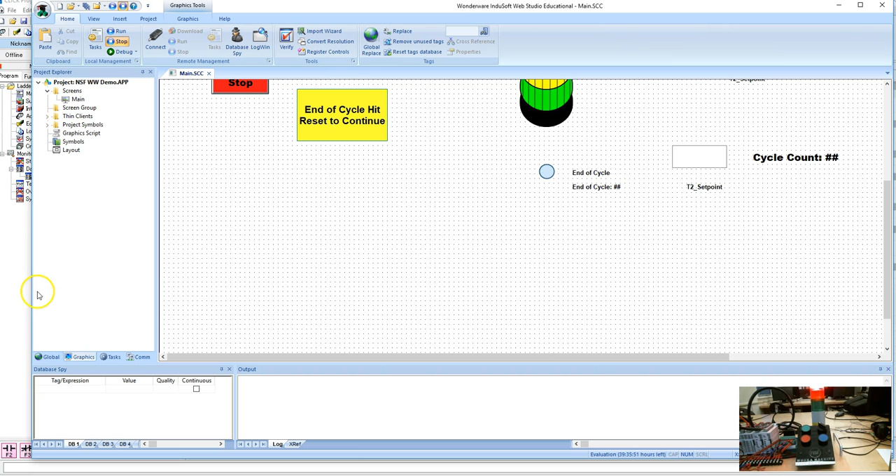What we have, and one of the things that we have to do, is import pictures of what some of the trainer parts look like.

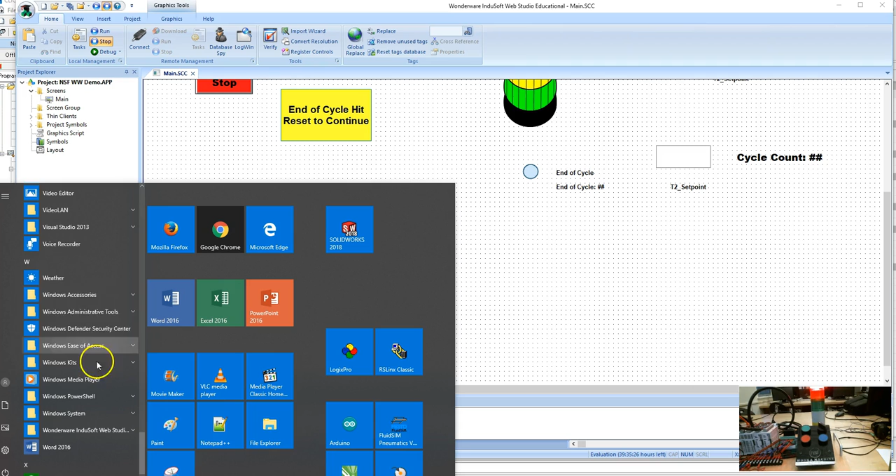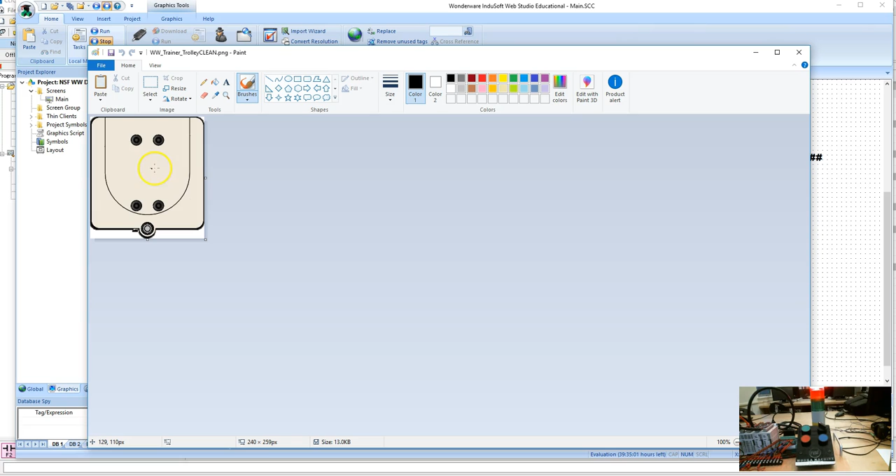And to do that, the best way I know how is to get Windows Paint opened up, and we can select what we want. I have some files on my computer with a whole bunch of pictures, some bitmaps and some PNGs. This is our trolley car, and this is the cup carriage. This thing moves back and forth from position to position.

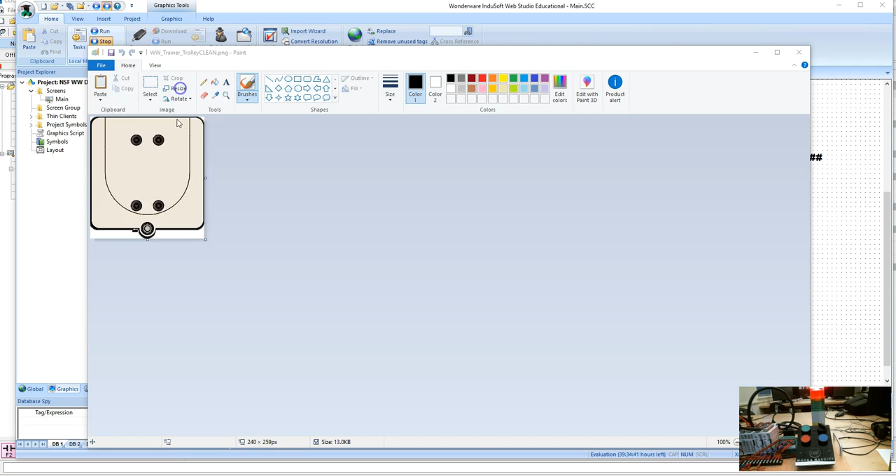Now this is a picture of what it looks like on SolidWorks. What we do is crop out around the part. This one looks a little too big, so I'm going to resize it, maybe make it half as big. Okay, so now that'll work better on my screen.

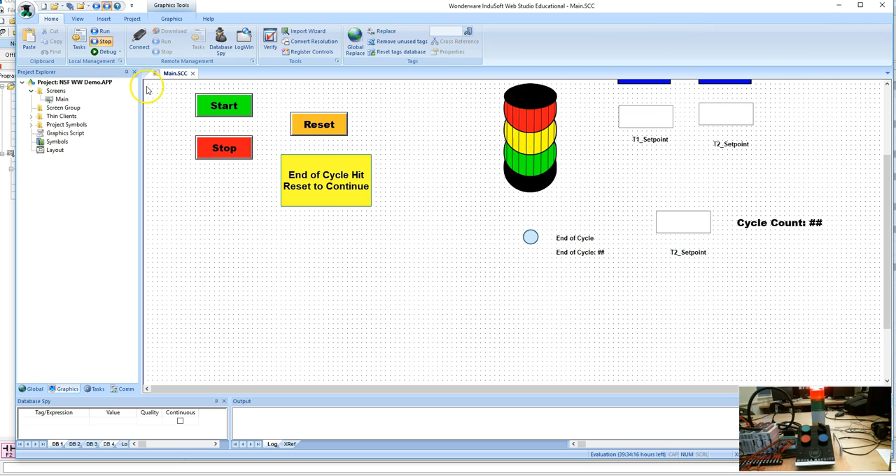So I just do Control A, Control C, and when I go in here I want to put it down here, so I'll do Control V. Now one of the things WonderWare does, it doesn't matter what the screen looks like, it always puts it right in the corner here. So if I do Control V, it's going to put it right here, and then I can move it. There it is, I don't know why it does that, but there's no way around it. So anyway, I'm going to move him right down here, and we're going to have him move across.

So just pretend here's where the cup dispenser is, and it's going to move down towards the sorter. Now what I'm going to do is also add a graphic for our sorter. Our sorter arm is a push bar that pushes the cup onto the sorter space. So I'll make a rectangle, try to line it up, and make him like that. I'll fill him in black.

Okay, so remember we have our counter, and we have it count a certain number of cycles. Now what I'm going to do is go in here, and we had the set point as DS1. Well actually, we have the set point on the screen. So before, this was count to 6, this was count to 4, and this was 6 cycles. But we have it on the screen, we can change it on the screen. So we'll go back into WonderWare.

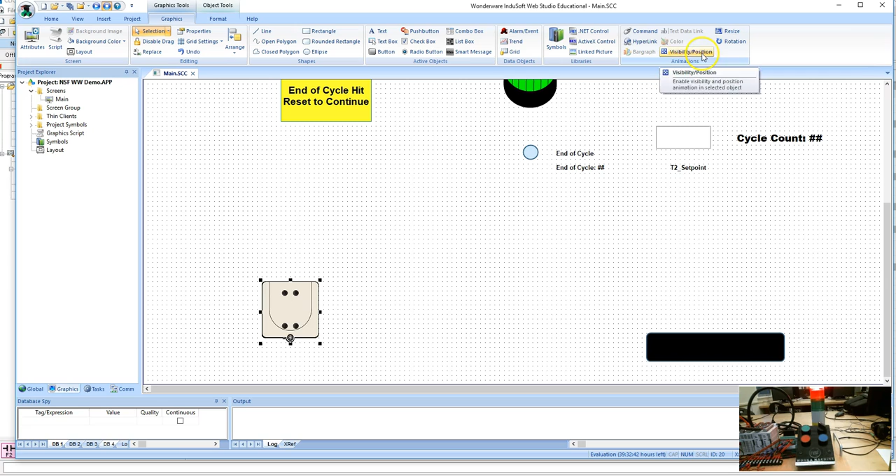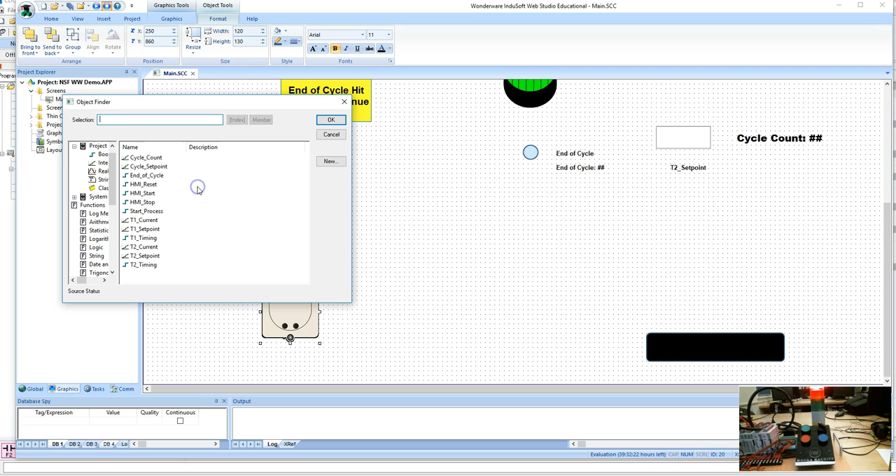Now what we have to do is add the animation. So we go into graphics, and in the animation, we put in color before, we did some visibility. Now it's visibility/position. So I'm going to highlight that, and I'm going to click on this guy, and now when I go into visibility, so this is visibility, I don't want that, but this is the position. So my horizontal tag, I'm going to use that cycle count.

My cycle count, okay, right now our cycle count is 6, but I'm going to up that to 10, and I'm going to make the position, not knowing where I'm going to be, just 0 to 100, and we'll leave it at that. And again, your 0,0 is here, so when it moves from 0 to 100, it's going to go this direction.

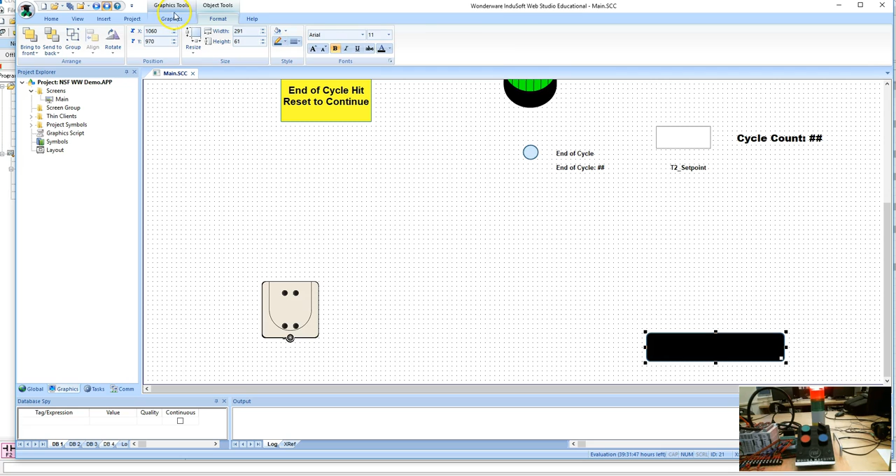Now for this, I want the push bar to push up, and I want that to happen at end of cycle. So I'm going to give him the position visibility, and when I go in here, it's the vertical position I want. So I'll have that with the end of cycle. And here, I'm going towards 0, so I want him to go negative. So this reference position is where he's at right now, and the value for this is going to be 0 to 1 because it's Boolean. And I'll say I want him to move minus, well, we'll make him minus 100.

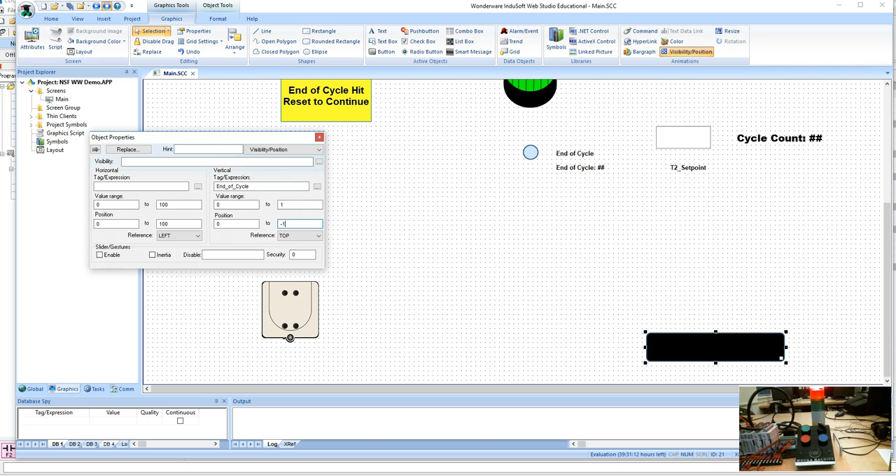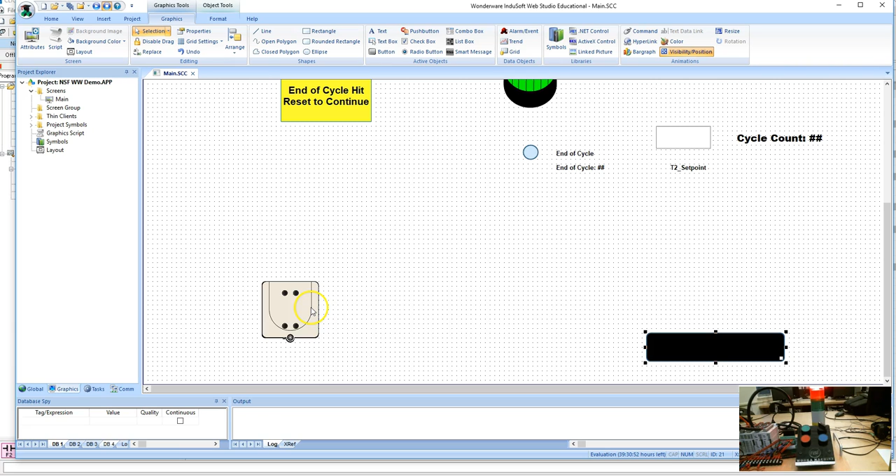Okay, so when this is set up and this is counting, as this cycle count is counting, it's going to start moving in increments. It'll be moving in increments of 10 since we're going to set this to 10, but it's counting to 100, so each move will be like a small little jump of 10.

So I go into, and we haven't changed this program at all, but I still need to connect up here. And this is the program that we've been running for the last couple of these guys. So let's see, right project.

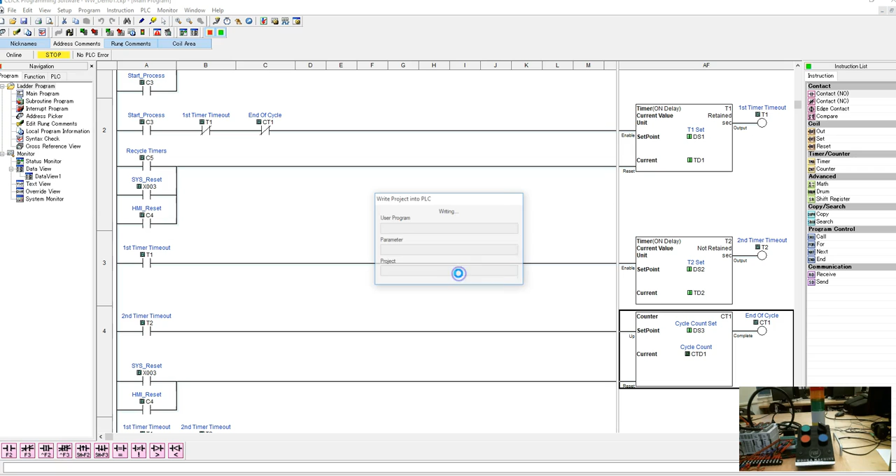Okay, stop it and start it again, and this should be ready to go. Now hopefully when we do the WonderWare, and we're going to go into run mode, the only thing we change is put visibility in here. And actually this bar is, well, our cup needs to be actually a little bit higher, I think.

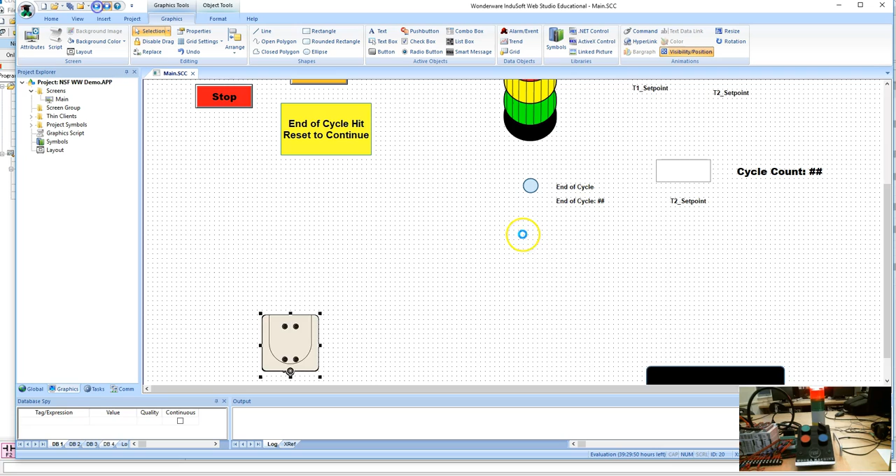Or no, okay, so I was practicing, so this is already in the up position. So let's go back into run mode, and if we reset it should move back down. At least that's what I'm sticking with right now. Okay, so it did, and we have the cycle count at 10.

So if we reset and we start, every time this counts, he's going to creep over a little bit. So let's see, and we are going to have to, so that moved a little bit there, and you can watch it incrementing just a little bit when it counts.

Now we're going to have to speed up this counting, since this is going pretty slow, and he's not going to make it all the way over here. I can pretty much tell that. Probably only make it about halfway.

So we'll kind of gauge where he's at, but if we're counting from 0 to 100, the two things we can do, well, if we cut this down, then the jumps will be bigger, but we can speed it up, and we can make that from, instead of 0 to 100, like 0 to, I don't know, 250 or something, or 300 maybe. See what it looks like.

But when we do get up to 10, this push bar is going to push. So if this cup carriage was in the right place, and if we had a visualization of a cup on there, when this moves forward, we could also have the cup move forward and fall into the sorter slot. We're still kind of finalizing the HMI for the actual system. We're still not even halfway through the semester, so we've got a little time to go. We have a pretty good baseline, but this is some of the stuff that we're trying to do with it.

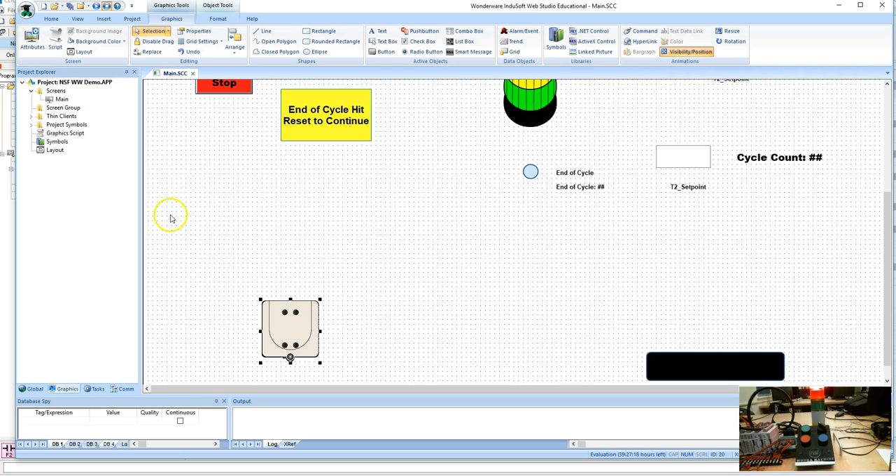And we'll go into run. And the first thing I want to do is I'm going to make this count fast. So I'm going to be 2 and 2 again. And when we reset it, this will move back down, and this will move back to its original location. So that's where our starting point is.

And now he'll be counting, and let's see if we get a lot closer to where we need to be when he pushes. And if it does, well, he'll be a lot closer, so we'll just let it go at that. But you get the idea of what we're trying to do. We can put in the position, we can also do visibility, so we can get whatever movement we require. Now, you know, it's trial and error at this point.

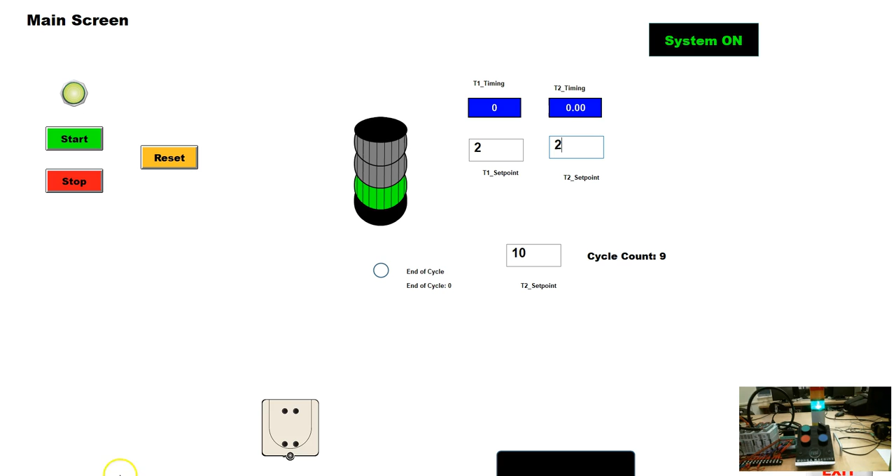So I think what we'll do right now is we'll put in another timer that'll kind of, well, that didn't get us much closer either. So, okay, let's exit.

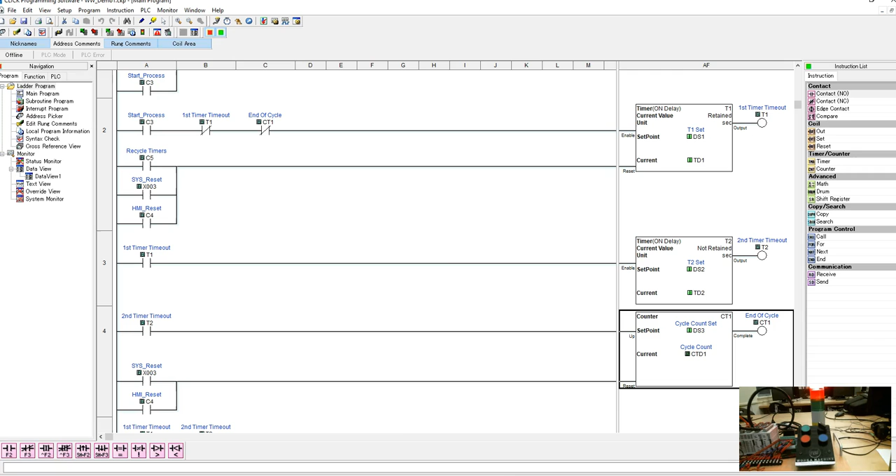Okay, so what we're going to do is I'm going to copy all these guys again. Well, let me, I was going to put in another counter set in here. So what I want to do is I'll go down to the end here and insert a rung, insert another rung, and insert another rung. And I'm just going to put in one quick counter.

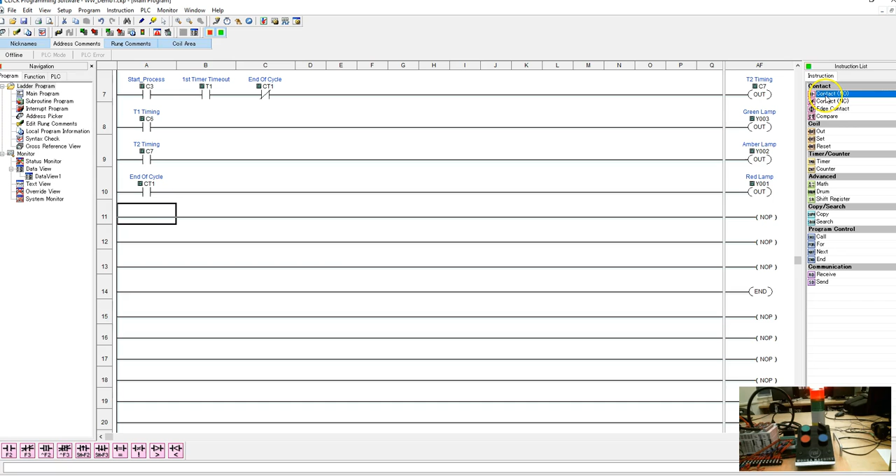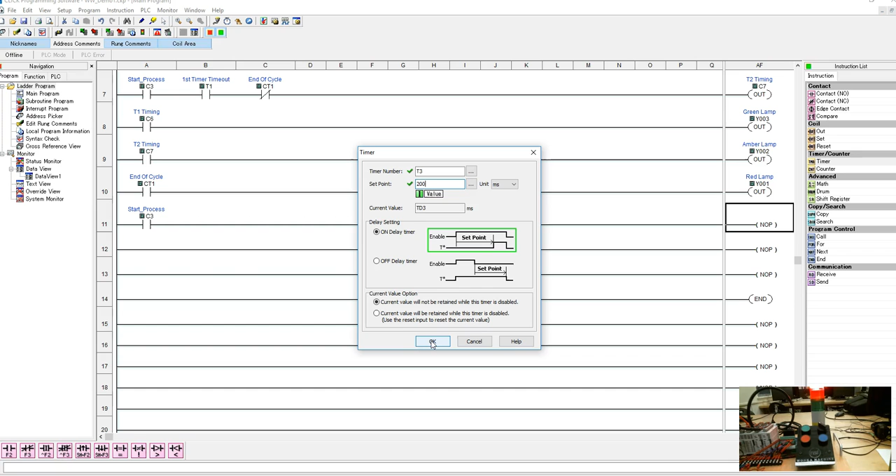So let's say when we are in start process, so that'll be C3, and I'm just going to put a timer out here, and I think we have T3 available, and my set point, I'm just going to make that, I'm going to make it count fast, so 200 milliseconds, so count 5 times a second.

And what I'll do here is I've got to recycle the counter. I am going to put a normally closed contact in. It'll be T3 that'll just recycle itself. And down here, I'm going to put a counter. And that'll be, I'll just make it CT3. And the set point here, if we're counting 5 times a second, let's have that count to, say, 200.

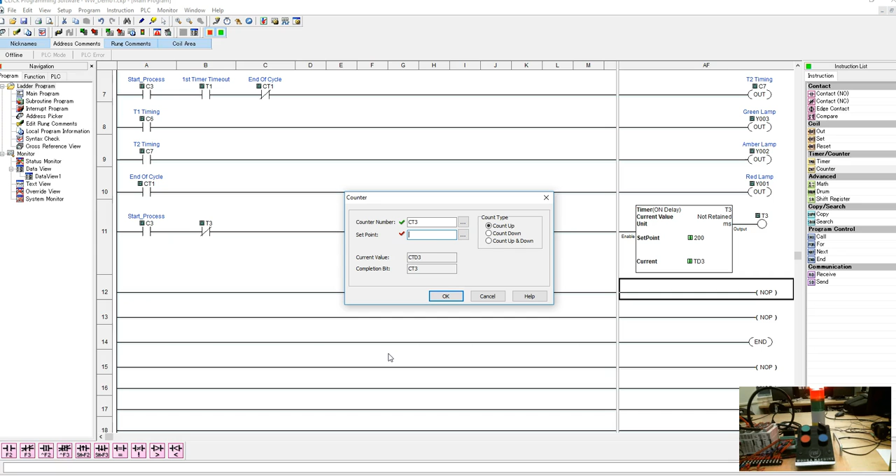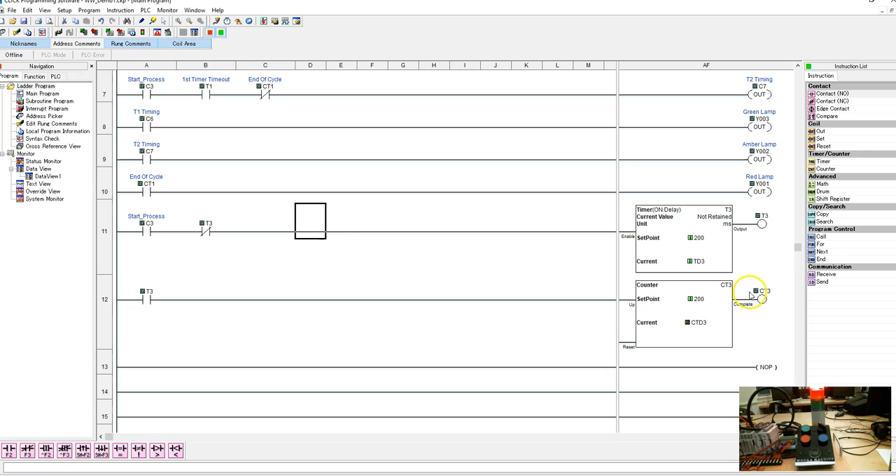I don't know what a good value is, and we'll count it with T3. And this will keep counting until we get to the terminal count. So when it goes to terminal count, we'll stop this counter. So we're normally closed contact, and it'll be CT3.

So hopefully when we start process, it'll start counting up to 200, and I'll have to put a reset into here. So I'll just make that X003.

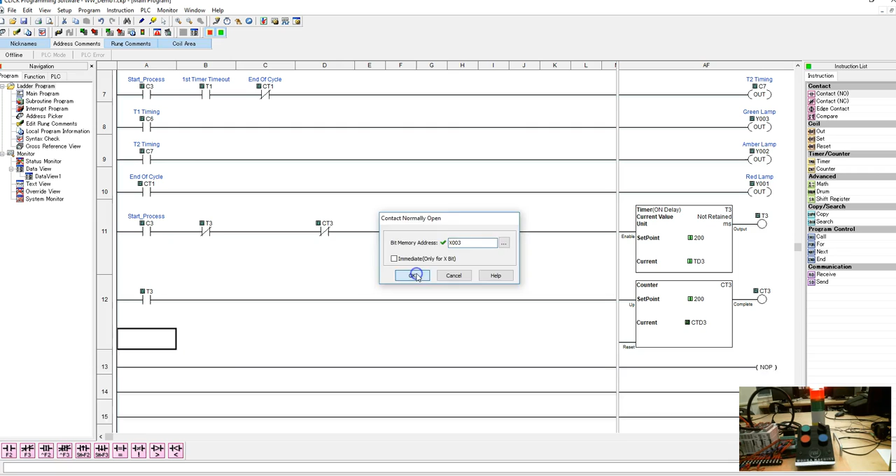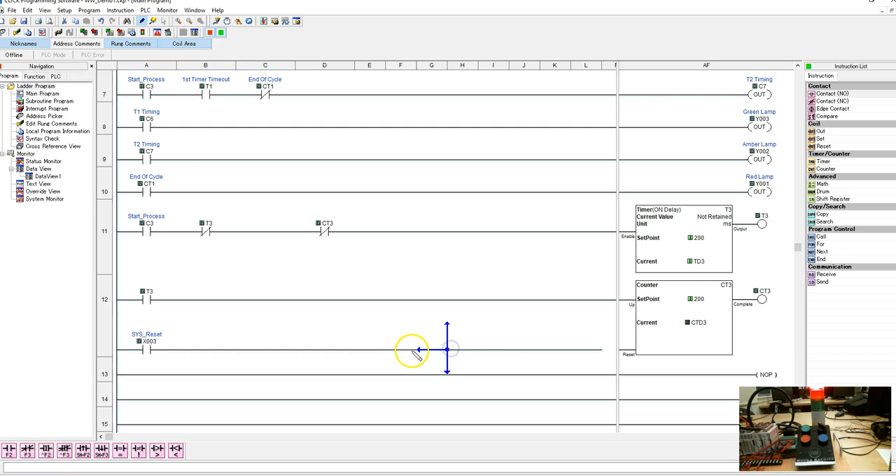I was also going to probably put a different type of graphic on here, and this line draw is really irritating at points, but it's a necessary evil. Not all PLC programming is glamour—this is the part that's kind of painful.

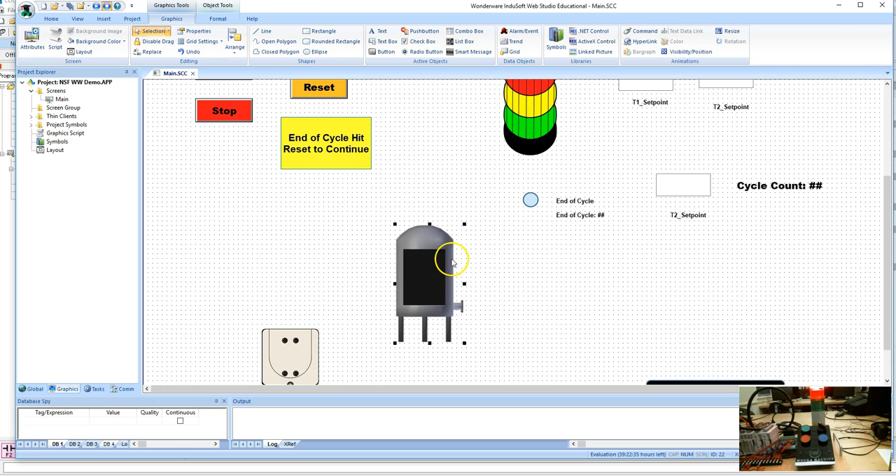So the other thing we're going to do is go into WonderWare, and I'm going to put in a different thing. I'm going into my symbols, and we had shown a tank to be filled, so we can put one in here. I'll leave that there, but what I want to put in is a rectangle, sized to match our tank.

I'm going to put an animation, and this will be a bar graph animation. In here, I'm going to put a tag expression, and I'll just call it CT—CTD3. So I'll call that CT, CTD3.

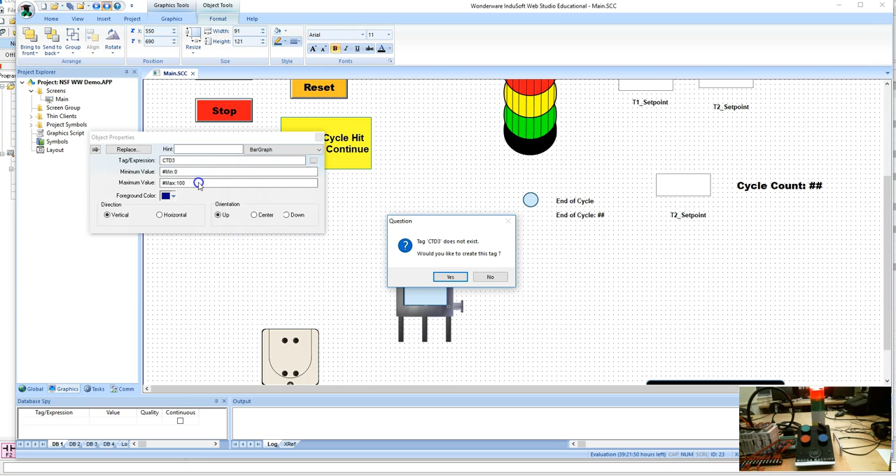That's going to be an integer, and the maximum value is going to be 200, and the minimum value will be 0.

Now what I have to do is go into my communications to my driver, and now I need to add CTD3.

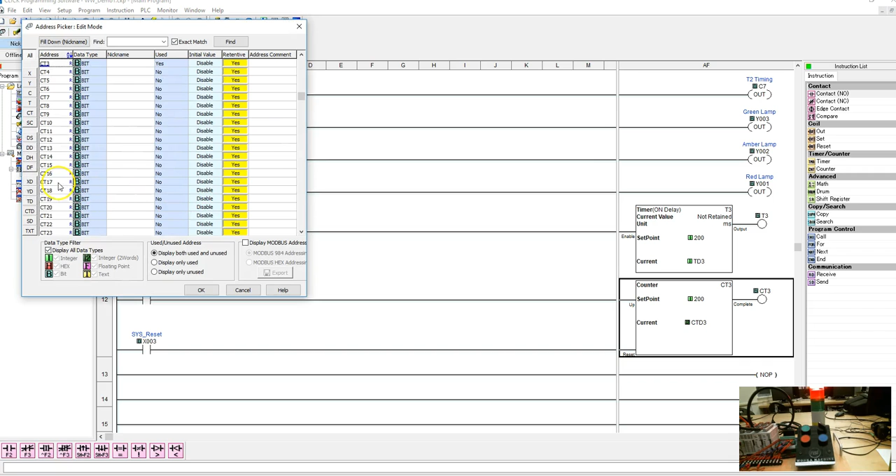It'll have the same address—somehow we're having a problem with this Click PLC program, so we have to reload it every time we want to use it. If we go into our CTD3 and look at the address picker, it's going to be 449,157, so it'll be 4x 49157.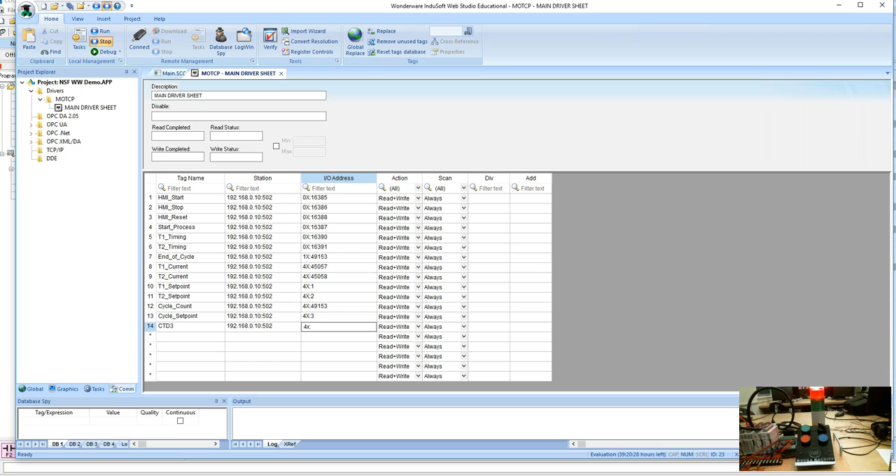So, 4x 49157. Okay, let's see if this does what we want it to do.

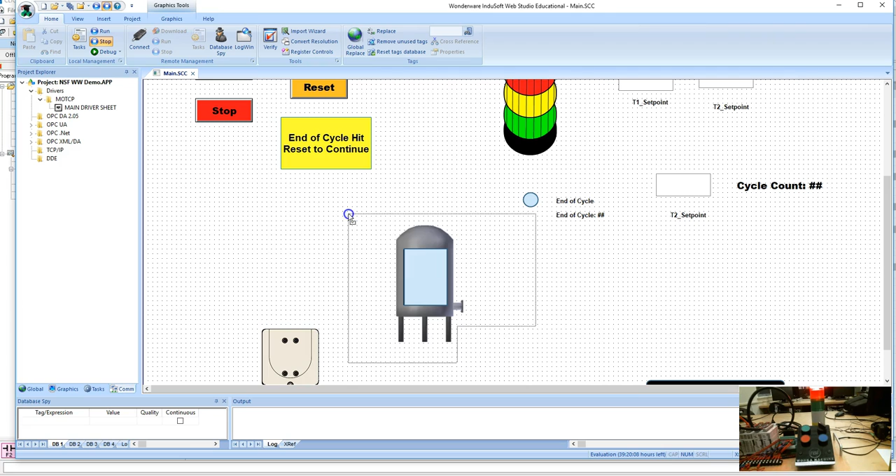So we're going to change this one. Last time it said 350, so let's do 500. At the same time, this will move across, and this guy is going to fill up. And let me just—the foreground color, I guess that's going to fill up with the deep blue. We'll find out.

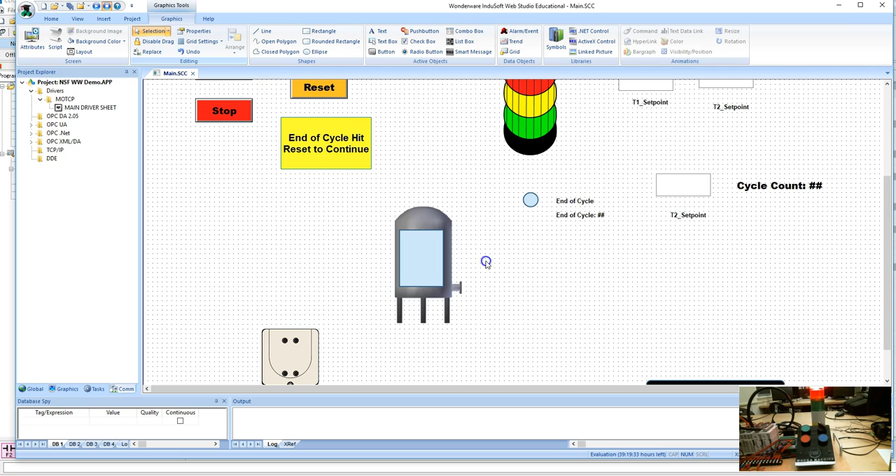Also, this is moving to the grid. You can also go to Graphics and into Grid Settings, and I'm going to turn off the snap. Now I can get a little better resolution on how I want to put that. So let's just give it a try and see what happens here.

Okay, we're still going to 10, and hopefully it'll get over here and start filling up. We'll reset everybody and get it going and see what happens. This should be filling up, and if we don't see it filling, we want to check what our program looks like. We'll let this guy go and see if he's in about the right position at the end. This one isn't doing what we want, and I think that's because I didn't tie a tag to it.

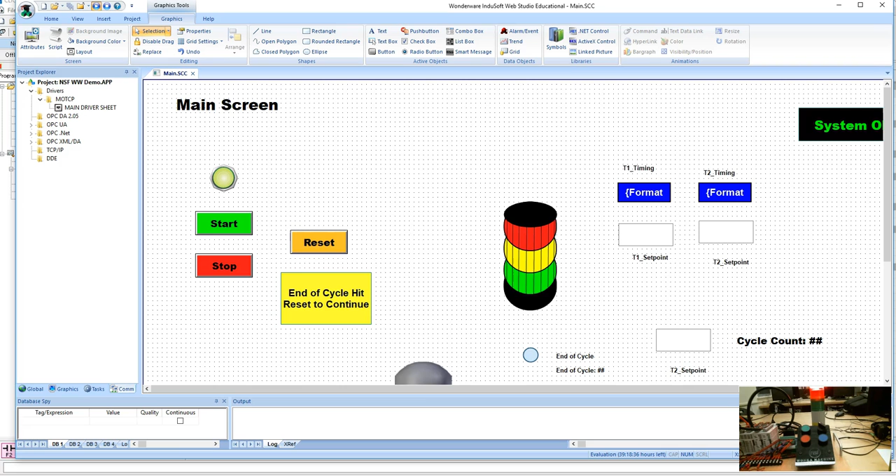So, 7—we're still going to be a little shy here, so we'll up that one by about 10% or something, and we'll take a look at what's going on with this guy.

Okay, let's take a look at this guy. Oh, I didn't change the program—need to write the project into the PLC. Connect. Okay, I made all those changes and didn't load it, which I do more than just occasionally.

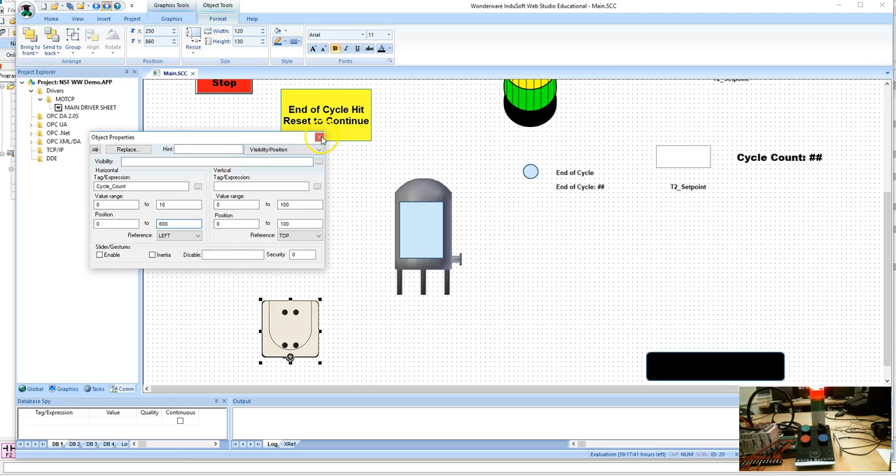Okay, now it's turned on, so now it should count up to 200. Now I want to go in here and change this into 500—let's change it to, I don't know, 600. Okay, and hopefully this will work.

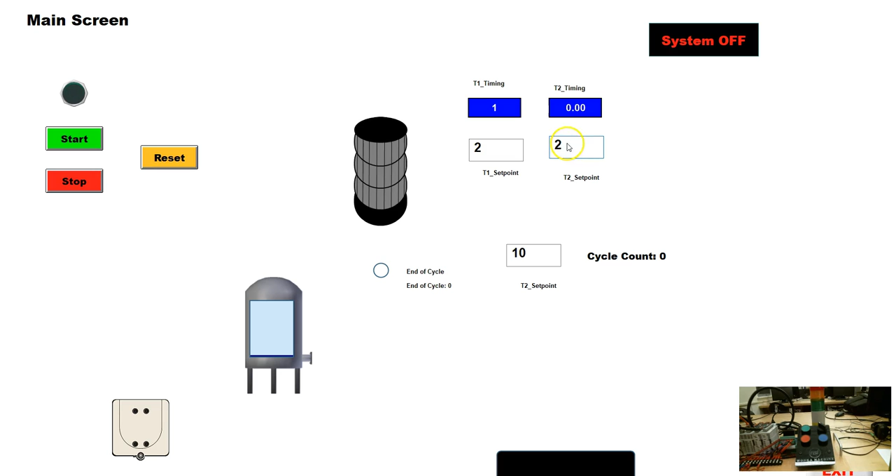We'll just leave it at that wherever it works, knowing that when you do these things, you are going to have to do the trial and error stuff. I'm going to stop it because I do not want that at 6. So let's reset and start here. Okay, so now this is filling, and that's what we want.

We had a little exercise where you're supposed to fill up a tank, and pretty much any of the exercises—the light stack works wonders, but you can also put your own visualizations in here, pretty much anything you want to visualize and anything you can control. This is more or less what we do when we're moving the trolley down the cart, and we're still not going to make it here, but with a little trial and error, we could get it to the right spot, and then the cup would be pushed off. When we get that working, we'll be happy. So that's the additional visualizations.

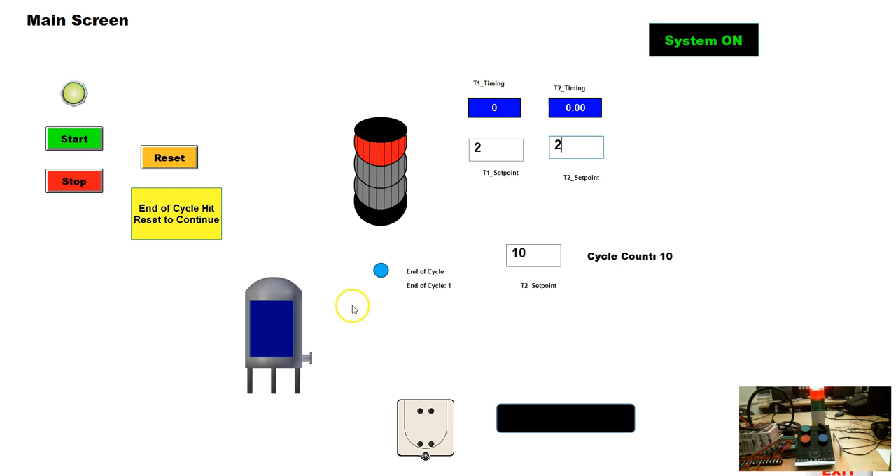If you register with Wonderware, they have fantastic videos, and you can do this and ten times more. It's really good stuff to watch. Anyway, I think we're going to have one last video on the HMI, and it'll just be how to clean up the screen and show a couple other things. So we'll see you then.